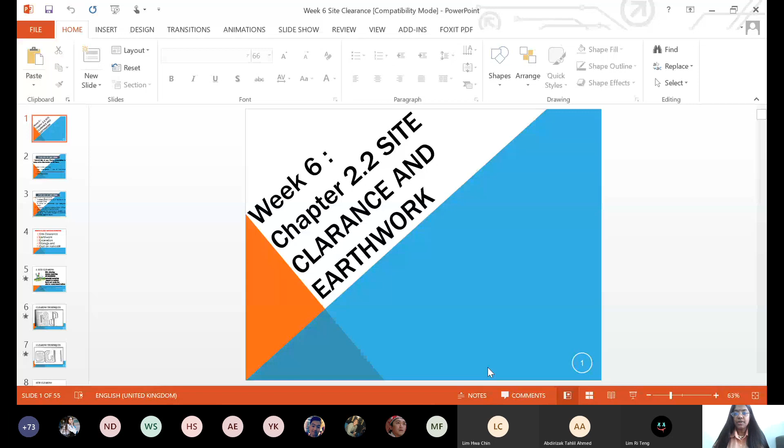Yes, okay, thank you. So last class we started with site planning, which is the second topic under construction technology. Last class we saw under site planning, we had site investigation and site preparation. We had some information, guideline codes, and methods under site investigation and site preparation.

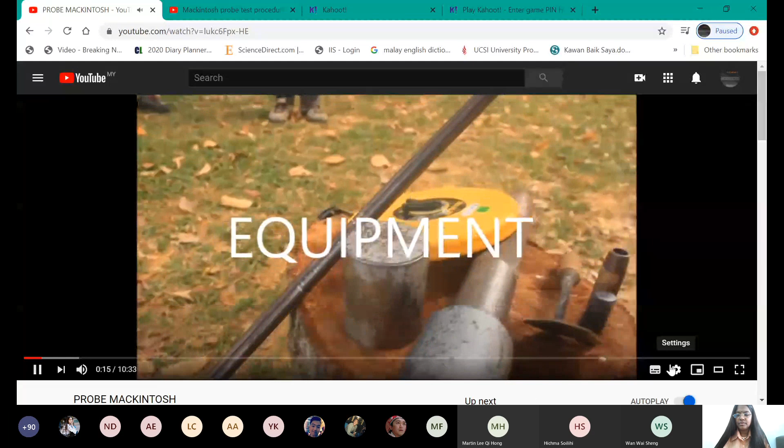The equipment you need to carry out the Mackintosh Probe are boring rods, rod couplings, penetration cone, measuring tape, hammer, oil or lubricant, gloves, lifting tool, and trowel.

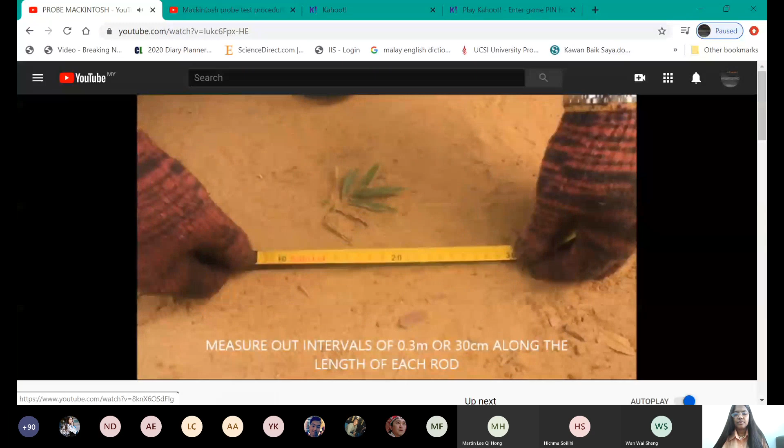Step 1, Preparation. Measure out intervals of 0.3 meters, or 30 centimeters, along the length of each rod and mark each interval with liquid paper.

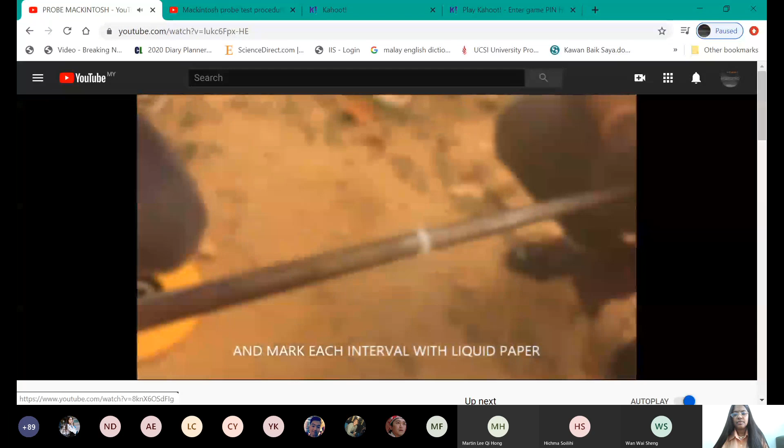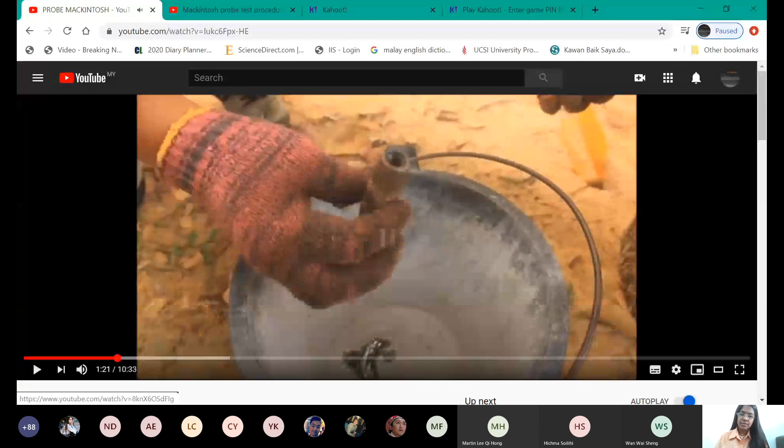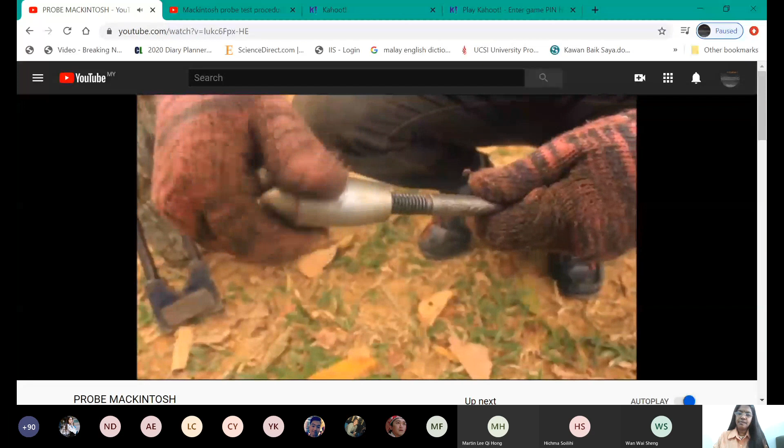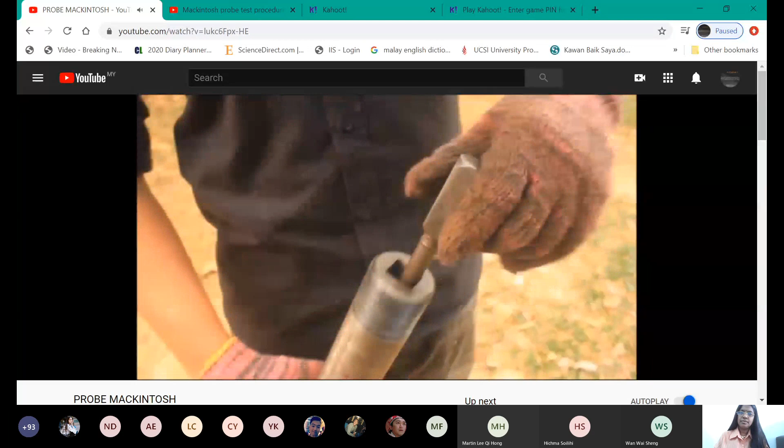Step 2, Equipment setup. Using oil as a lubricating medium, lubricate the screwed ends of each rod coupling, and also the penetration cone. This must also be done for the hammer part. Ensure that the lubricant covers all the screwed parts well. Attach or screw in the penetration cone to the first rod. Insert the hammer into the rod and screw in the stopper, ensuring that the stopper is firmly attached. It is important that the stopper be screwed in tight enough and properly to avoid any injuries. Finally, screw in the cap of the hammer tightly.

Step 3, Location. Make sure the area of soil at which the rod is supposed to penetrate is clear of any rubbish, debris, or tree roots. Position the penetration cone along with the rod and hammer firmly on the ground.

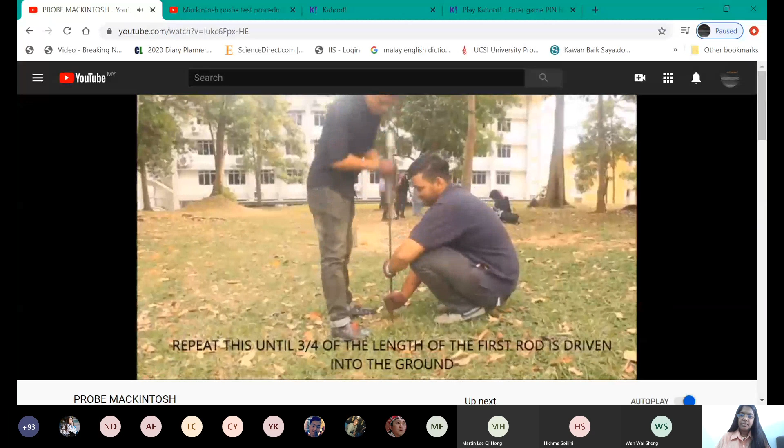Step 4, Penetration. Hold the bottom and middle part of the rod very firmly to avoid slipping. This ensures that the rod is inserted into the ground in a straight position. If the rod is tilted, it may be damaged or bent as it goes deeper into the ground. Lift the hammer upwards until a click is heard. Then release the hammer in a manner that allows the weight of the hammer itself to drive the rod into the ground. Repeat until the rod is inserted either up until the 0.3 meter intervals or until an accumulated number of 400 blows is reached. Record the number of blows the rod required to reach its 0.3 meter interval. Repeat this until three-quarters of the length of the first rod is driven into the ground.

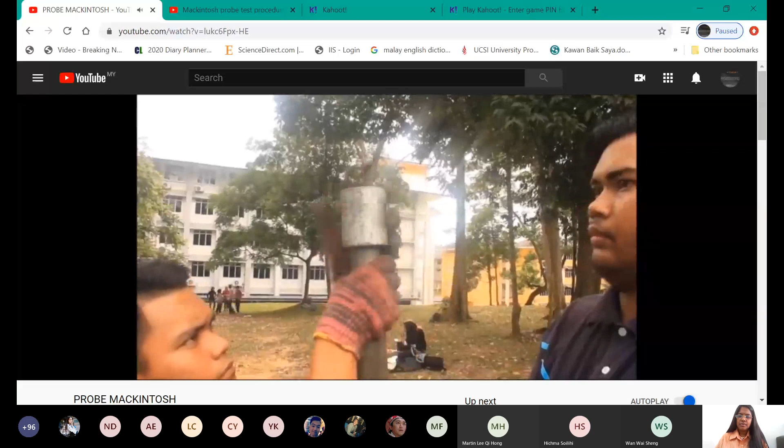Step 5, Attaching more rods. Unscrew the hammer cap and the stopper, and then take out the hammer. Screw in the rod coupling. Attach the second rod tightly. Insert the hammer back into the rod and screw in the stopper and hammer cap. Continue blowing and recording the number of blows.

Step 6. Dismantling equipment. Once an accumulated number of 400 blows or 4 rods have been achieved, the rods can now be taken out. Start by unscrewing the hammer cap and stopper.

Take out the hammer from the rod. Using a lifting tool, extract out the rods as shown. It's called a pipe wrench. You can use the pipe wrench to extract the rod.

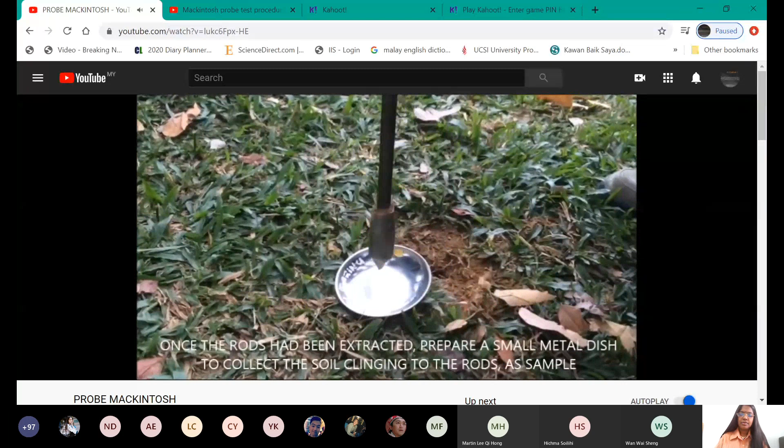Step 7. Sample collection. Once the rods had been extracted, prepare a small metal dish to collect the soil clinging to the rods as sample. A trowel can be used for this.

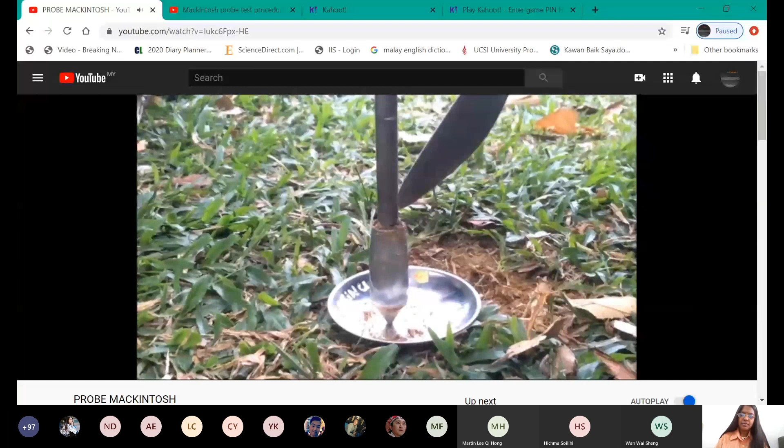Collect enough soil sample to be brought back to the laboratory for testing.

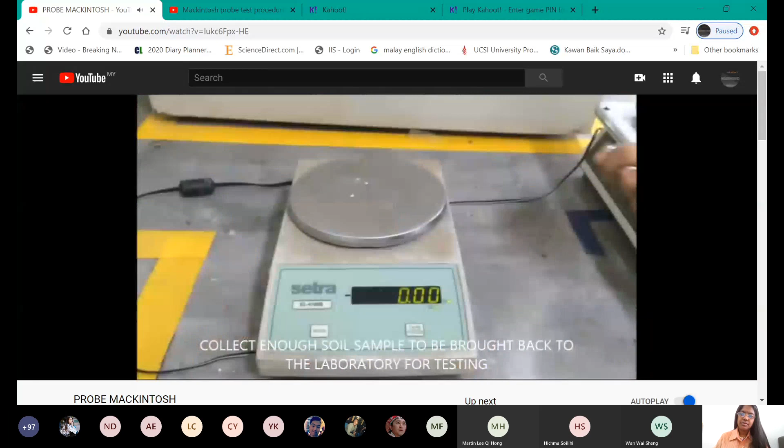Step 8. Laboratory work. Record the weight of the empty dish. Next, record the weight of a soil sample in the same dish.

Place the dish inside the oven to dry out all the moisture in the soil. Leave it inside for 24 hours.

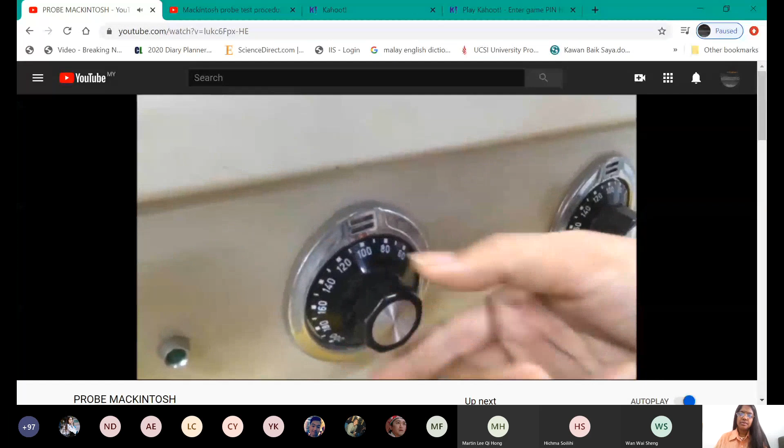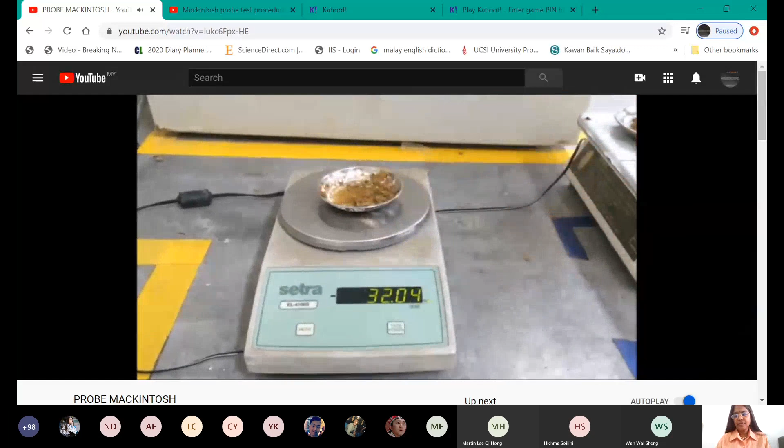After the 24 hours is up, take the dish out and weigh it again. Record the new reading. All the data and readings recorded can then be used to carry out soil moisture testing.

Okay, I stop here. So you have seen the soil sampling for a moment.

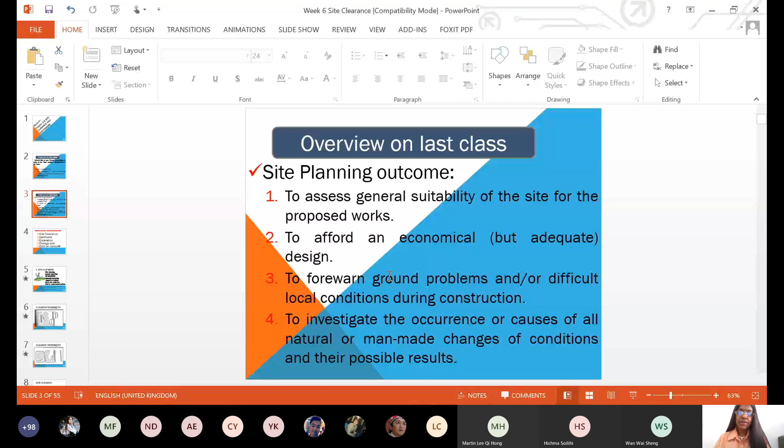Site planning outcome. Last class you would have come across all these topics, and then the understanding on how the site is prepared for construction and what are the advantages, according to the code number, right? All the statements are taken from the British code for site investigation.

Then next one, today's class will be on site clearance. Next topic under site investigation is after site investigation, it goes for site clearance, site preparation, and then earthwork. I put preparation and clearance together, then earthwork, excavation, storage, and quiz and Kahoot. This is the plan for today's class. Let's go quickly on this.

Site clearing. So what comes to your mind? Just clean the surface for elevating your structure, right? The surface should be clear from the very beginning before you encounter any future problems or future works. You should not plan for any future works during site clearing. It should be done in the beginning itself before construction starts, so that you can save money, save time, and unforeseen things will be eliminated. Site clearing means removing all unsuitable materials, including topsoil.

Including topsoil means wherever it is, up the hill or very high, very low, we need to balance out to reduce the level and ready the site for new construction, according to the contouring of your plot - we will see the profiles later. According to the profiling in the contract document, you need to level the ground. You need to clear the site and level the ground. These things are done under site clearance.

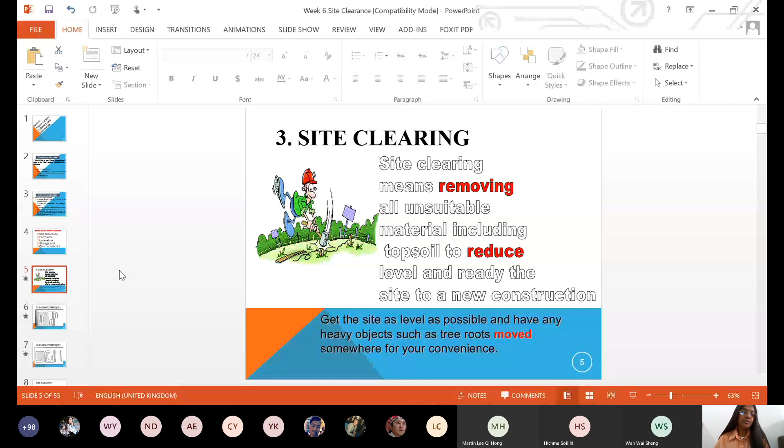You can have a plan based on the given site - it depends on the site condition. Maybe more forestry, or sometimes cemeteries you have to remove. Sometimes you need to burn - later you will see how the clearing is happening, maybe by burning or by implosion. By using implosion, you can remove those bridges. If it is metal, you have to burn it, set it to fire so that it melts and you can remove those strong structures from the site.

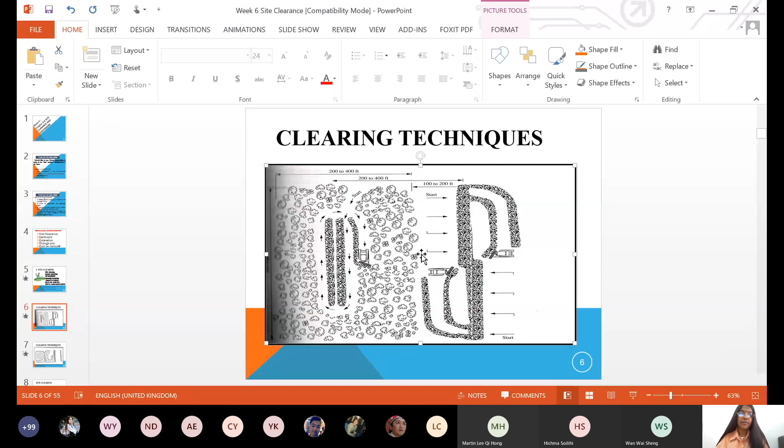This is another example of clearing techniques given here. There is no strict procedure as such, but the main concept is that cut and fill should be equal, or cut should be less and filling can be more - actually, you have to cut less and fill less. Even if you cut more, fill should be less, so that you can save some soil for reuse, or you can even sell it. These are the concepts we have to keep in mind, depending on the site conditions.

During site clearing, topsoil needs to be removed because it is easily compressed and unsuitable for construction. Loose soil has to be removed because you're going to construct the foundation reaching the strong strata below the ground. So you remove all the topsoil that won't give good bearing capacity or strong foundation strength, starting from a subsurface layer that is a little harder, until you slowly reach the harder surface.

Establish the exact position of the building from your site plan, which will show the plot measurements and position of the drainage, and so on. You have to mark with charcoal or any liquid paint the position at the site where the drainage is going to join the main line - that is important. Also mark where you are taking the water line from and where it leads to the houses.

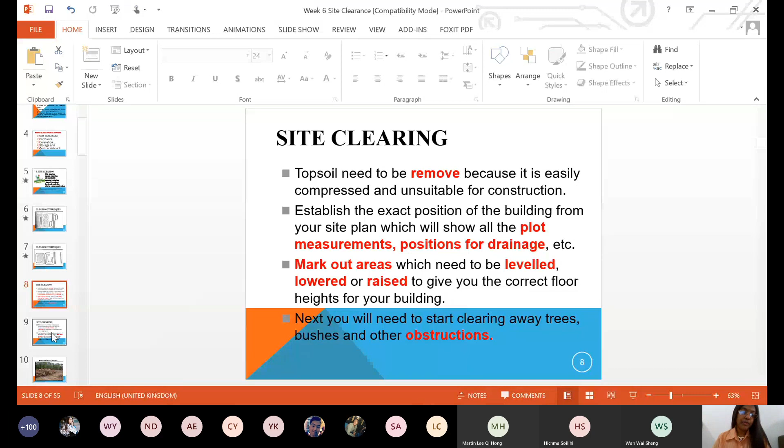Site clearing: make sure any existing underground services like electricity, water, and gas supplies are clearly marked and identified so they are not damaged when digging out. Care should be taken for these three: water, electricity, and gas supplies. With water, it may be water supply or wastewater supply, which is municipal supply already there—you should not disturb them, maybe because you will be joining to that main line. You should not damage any electrical transmission line. There may be a small building you've seen on your way home hosting transmission lines for the whole community, so you should not disturb them. Care should be taken to avoid such disturbance to public utilities.

Normally you will clear the ground about 2 to 3 feet beyond your marked points to allow room for pouring foundation footings, block work, drainage preparation, and damp proofing. So you can have extra foot but not very deep.

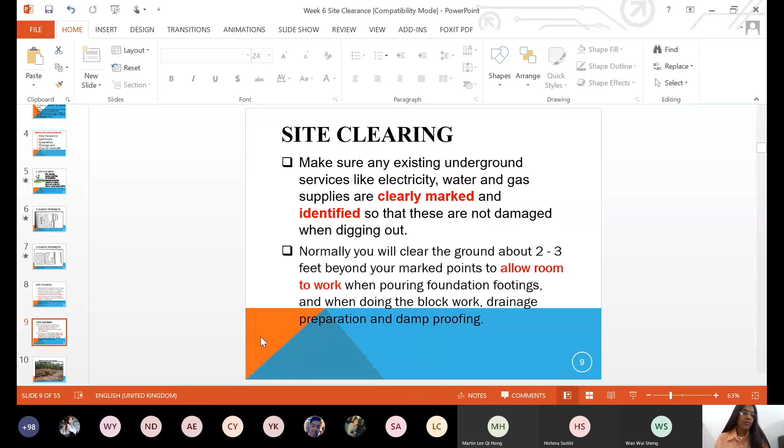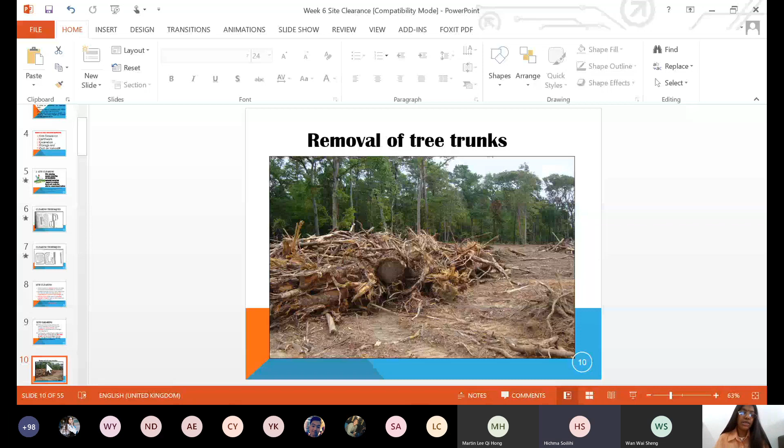For cutting soil, if it exceeds 1 foot, you should get approval. Care should be taken, and if you read the guideline you can find this information. If you're cutting soil below or above 1 foot, you should get approval from the land authority for marking. All these rules and regulations are written in the building bylaws—UBBS, Uniform Building Bylaws—under the land authority or Ministry of Works.

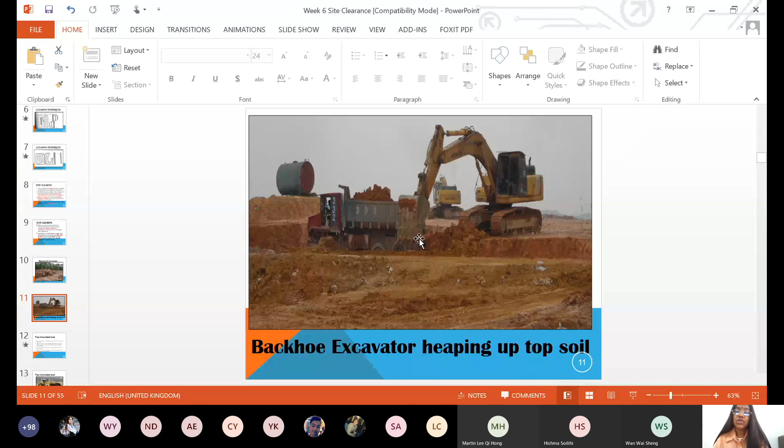Okay, you can see the backhoe which is used for clearing the site. See here, it's not leveled—there are some hills, very high, not level. So slowly it is removing or cutting the soil using the backhoe. You can see the sharp, pointing ends which cut the soil, collect it, and fill it into the truck so it can be disposed of or cleared from the site.

The type of machine used will depend on the soil and rock present. Hydraulic excavators—most backhoes work under hydraulics. You can also see cranes, shovels, dozers, bulldozers, loaders, and scrapers—excavators, all based on hydraulic principles.

I will not go into the hydraulic principle—you might have studied this in fluid mechanics. What do you call the principle? Pascal's law, right? Pressure applied at one point is distributed equally and uniformly throughout the section or area. That's different from what you'd learn in general fluid mechanics—it's a very interesting mechanism from which many applications have come out.

This is one of them, hydraulic press, using the backhoe. The type of machines I explained already—shovels, dozers, bulldozers, scrapers. Carriers are also important in making site clearing work faster. If the trucks are not sufficient to carry your removed soil, the work will be delayed, so plan sufficiently for the amount of soil to be cut and transported off.

Each machine has its own capability and use in various situations. So even as a civil engineer, you should know some mechanical functioning—what horsepower it works at, what velocity it travels, how much it can carry from one place to another, and the capacity of the truck. You should know all these things to plan your time for site preparation nicely.

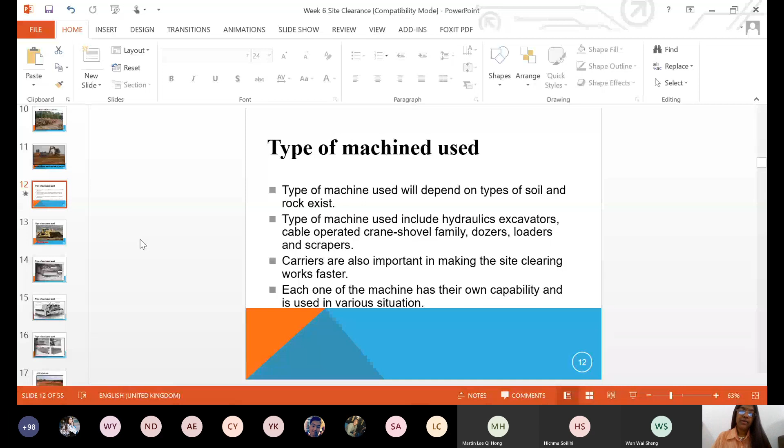Once site preparation is done on time, you can further ensure quality of work and completion on time. Another type of machine is the bulldozer—this is called a bulldozer.

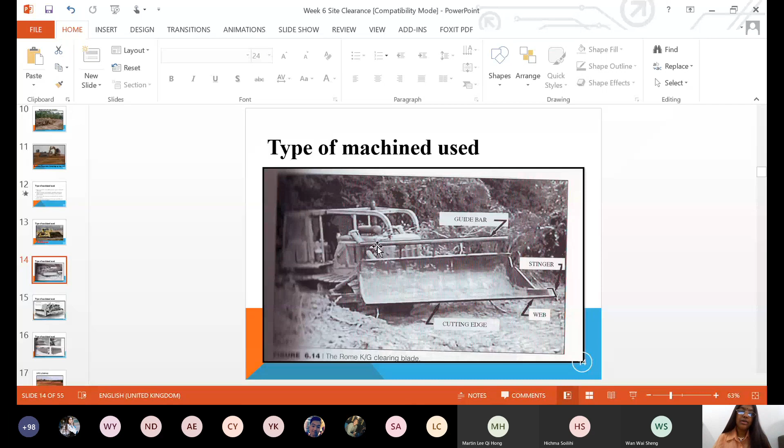Again, it is having a big bucket which can move huge soil, huge waste at the site. Then another type of machine used is a clearing blade, bulldozer. You can see the big pan or bucket, it's having a cutting edge, it's a small web to position the soil, and a guide bar which can be moved up and down.

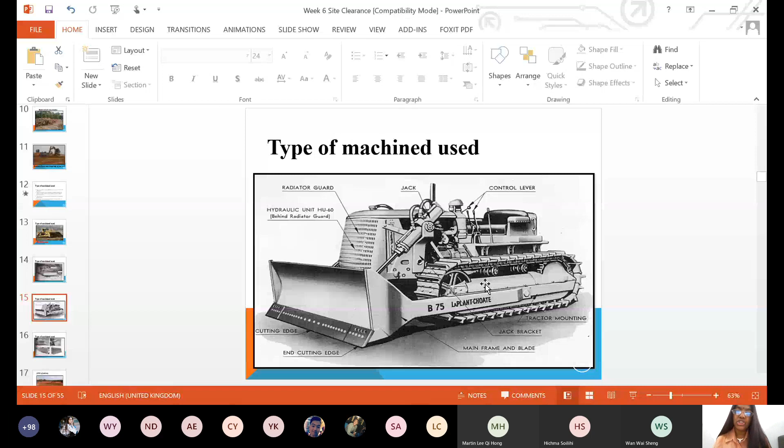And then another type of machines used, you can just have a knowledge on all these things. What are the parts of the machine, I don't ask in the exam what is the part of the machine, but you must be knowing parts of the machine and how they are operated, how they are positioned, how they are used while in operation.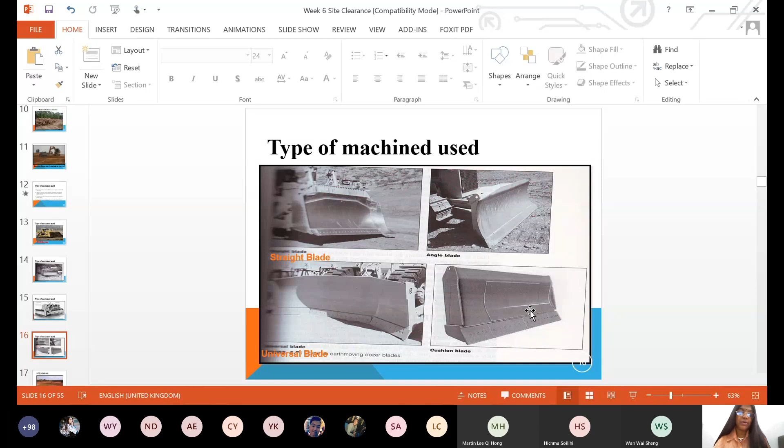Further, the blades or buckets may be having a straight blade, angle blade - the angle may be 30 degrees or less - and a universal blade, right? Something like this. And then a cushion blade, which has a smothering effect. Maybe for loose soil it is important, but for hard soil you have to go for straight blades, right?

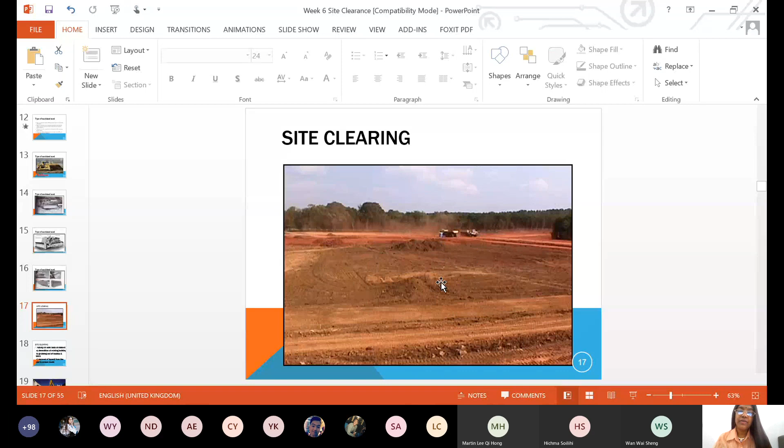Site clearing - see the site somewhat clear, it is ongoing, the process is ongoing. It may look like this. You must have a barren land, cleared surface for starting your foundation.

Site clearing activity is for demolition of existing building, grubbing out of bushes, trees, removal of topsoil from the site to reduce levels. Site clearing mainly means removing rubbish, removing bushes, removing topsoil which is loose. If it is hard, you don't disturb it.

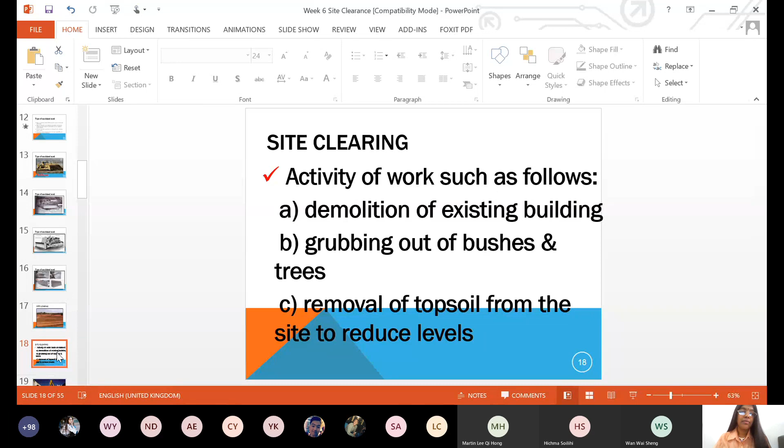The next one - demolition of building using logistics. So what are the equipments that can be used for demolition or removing dislocation of things from the site? You can use logistics like backhoe, excavator, bulldozer, or you can also use implosion.

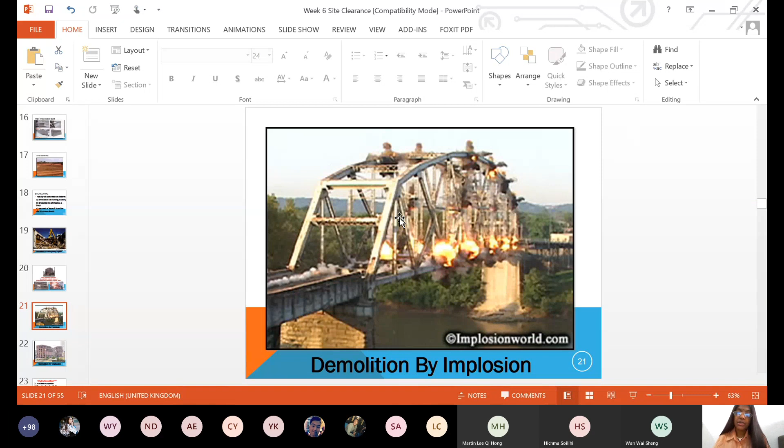There you can see the site is having a bridge, an old bridge, which has to be removed, cleared off. So they implode it. Explode is purposely explode - now this one is imploded so that it will not affect the place, the facilities nearby. It is imploded so that it will be removed nicely without affecting the neighborhood. This kind of firing, burning also, you can use for removing site disturbances or site materials.

A skilled occupation, simply put, breaking, should only be tackled by an experienced demolition contractor. Otherwise you know the effects - maybe risk to the people, the workers at the site, risk to the construction site, risk to the neighborhood. There are certain methods to demolish unwanted old buildings without causing danger to the building nearby.

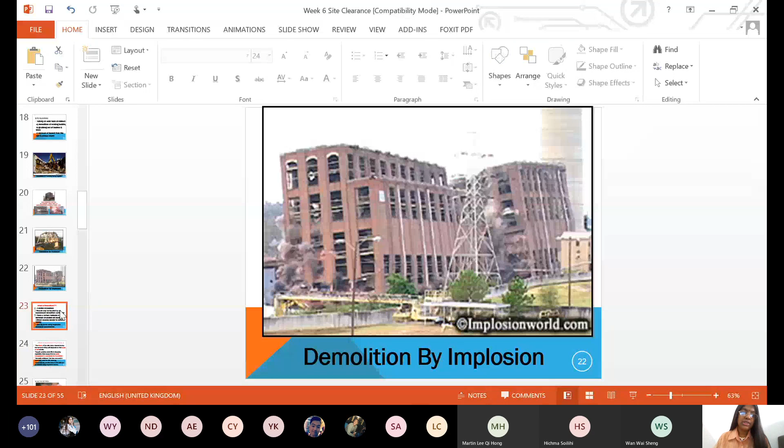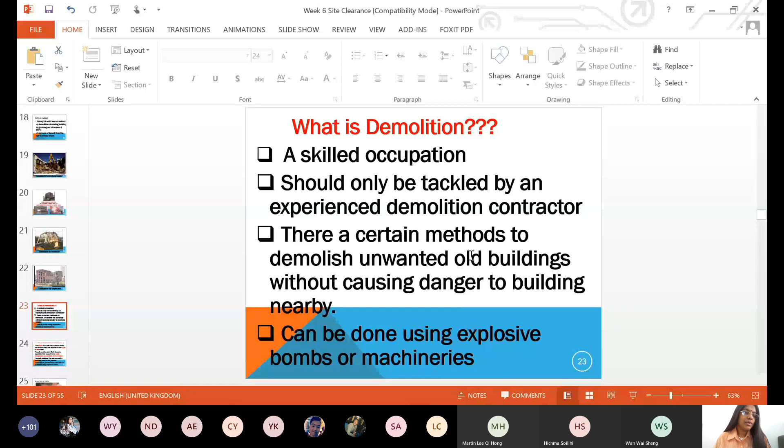It can be done using explosive bombs or machineries. This is quite common in USA. We can see quite a number of buildings being demolished, mainly because they want to start from the underground - they want to build some 100 floors below the ground. They start with 100 floors below the ground, then raise up to the superstructure. So their plan is to have all structures constructed with underground structures. So they demolish and reconstruct. This is quite common in USA, Japan, and China.

What is demolition? The depth of the site being cleared during the removal of topsoil depends on the types of soil at the site - whether it's 1 meter to 10 meters, decided by the type of soil. Topsoil contains plant life, decaying vegetation, compressed and unsuitable for foundation, so you need to remove all these plant roots - you have to completely deroot the plants and the trees.

Normally bulldozers and excavators are used for site clearing. Unwanted big granite rocks in the site can be cleared using explosive bombs. Rocks cannot be cut and removed, right? So you need to blast it to remove from the site.

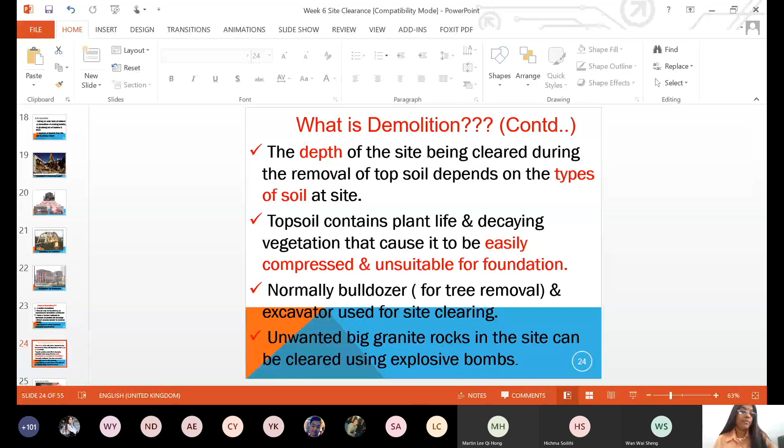Followed by blasting rocks, you must take care for the supersonic effect, sound effect from this blasting. You must really use the proper time to explode, inform the neighborhood, or inform people some kilometers away from the site about this blasting. Proper information and indication should be given before blasting to avoid any ear problem. The surplus soil is being excavated for site formation and site leveling. Existing rocks were broken down by excavators.

The lorry carried the debris and excavated soil away from the site. This is one example site which has surplus soil, some debris, construction waste, and wooden pieces. They are all removed and carried away by the trucks.

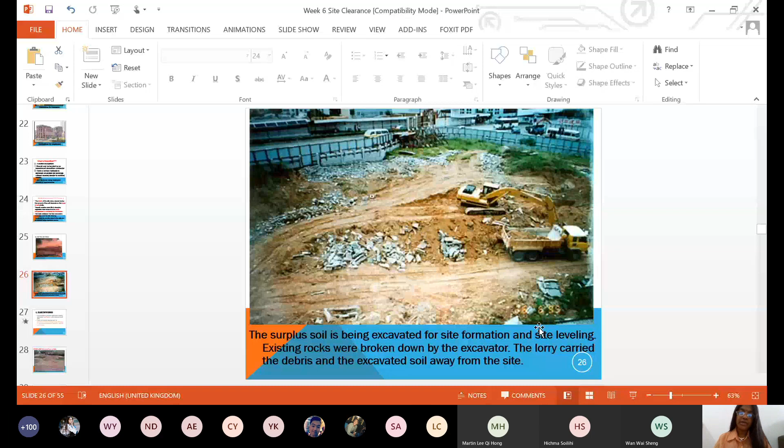Earthwork is any operation in and around land which results in substantial modification to the existing ground level. So we clear the site, then start earthwork for constructing the foundation.

The activities of earthwork are excavation, loading, hauling, placing, compacting, formation, cut and fill, and finishing. So earthwork has all these steps. We will see how they are done and what the criteria are for that.

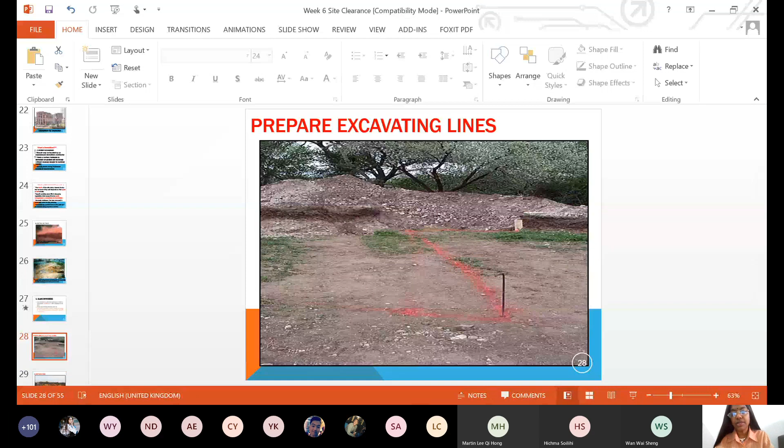Number one, preparing the excavation line. You need to mark it on the site using clay powder or lime powder, or liquid paper you can pour, or cement mortar or lime mortar, to mark the excavation lines for the foundation. Here is one example shown, where they marked it using a red line.

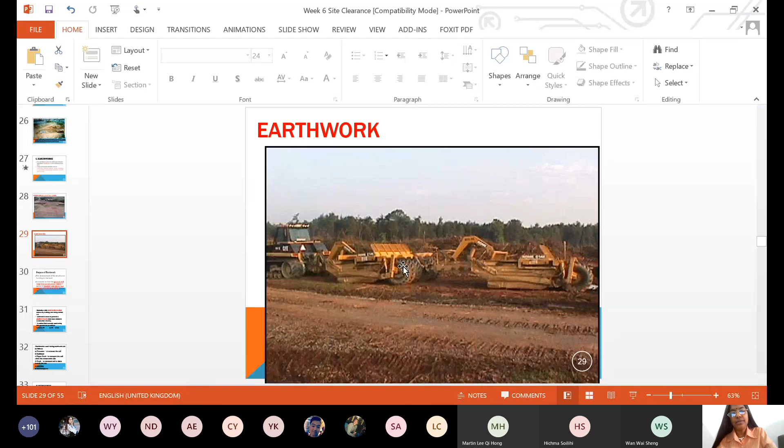Earthwork can be used here again. We are using backhoes for cutting soil, for development of the structure or building on the land. The purpose of this earthwork is to construct the foundation so the ground will meet the construction needs in terms of location, elevation, soil densities, moisture content, and so on. The process of earthwork cutting depends on the soil characteristics and rock formation beneath the ground, which decides the time and logistics used for the earthwork.

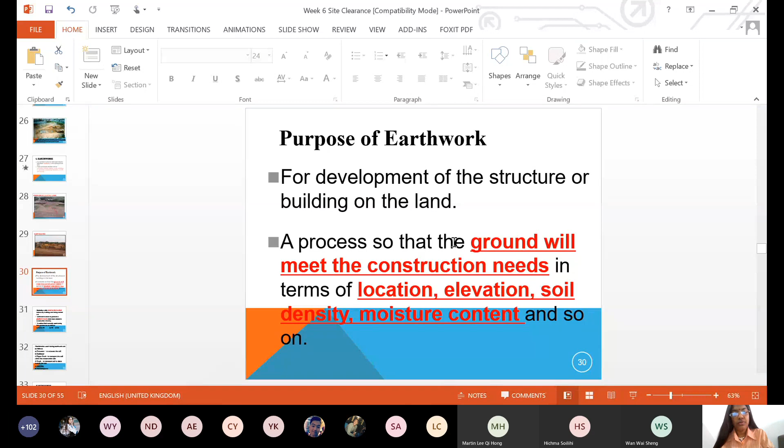Next, basically a site needs to be level before any building work is carried out. So you need to level the ground. Why do you need to level the ground? It needs to be leveled before building work begins, right, for any structure. Why does it have to be leveled? Why not just follow the profile?

To draw... because it makes it easier. To draw boundaries. So the building doesn't collapse.

Drainage - you plan for drainage, right? It should be level so that you can plan for proper drainage later on. Not necessarily, but for example, for any building they will start with subsurface construction, which is for drainage work. Then they start constructing the foundation, footing, basement, with the superstructure following. Mainly for drainage purposes it has to be level first, then you start planning from there. You already have the contours and the profile, but at the very beginning it should be level to plan for proper drainage direction for the building later on. Is this clear?

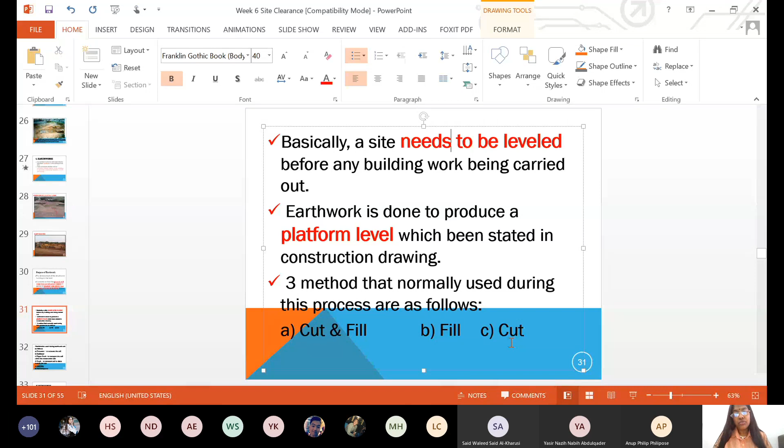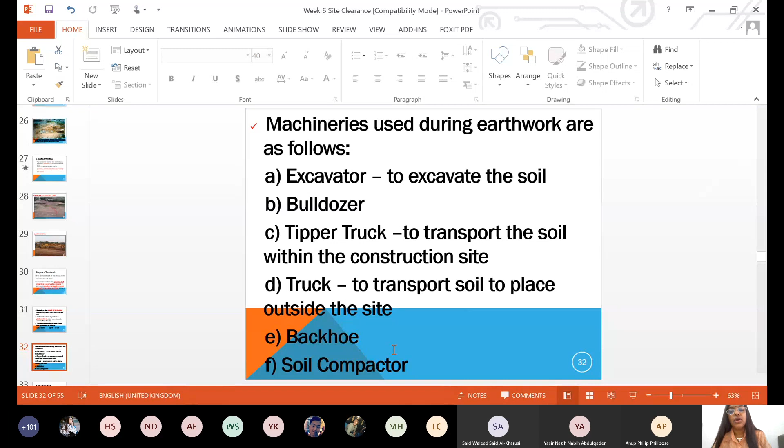Earthwork is done to produce a platform level as stated in the construction drawing. There are three methods - the types of cutting can be cut and fill, or only filling to level the ground, or only cutting to level the ground. Machineries used are excavators, bulldozer, tipper truck, backhoe, and soil compactor - all these are used for earthwork. Please read again and watch through, you may get questions like this: earthwork is done by excavator, bulldozer, tipper truck, backhoe, and soil compactor.

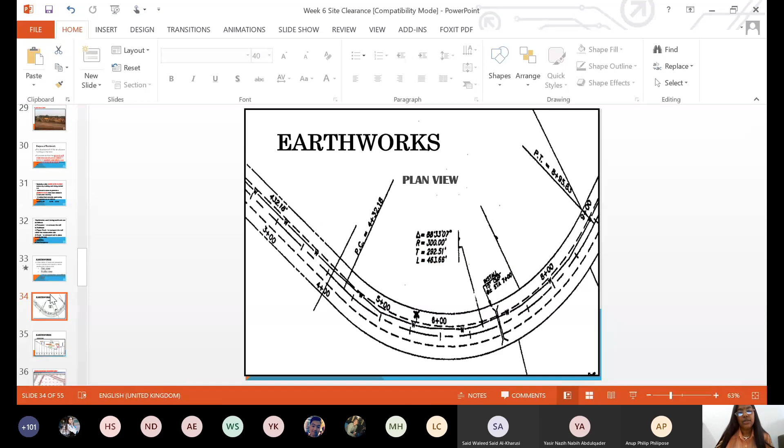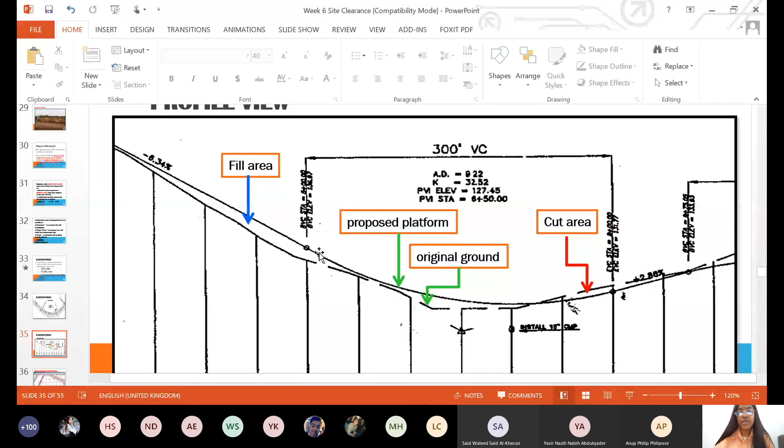So like this, the drawings will help you from the cornerstone of the building. You will plan at what distance is plus or minus. Accordingly, you will be cutting or filling to do the earthwork.

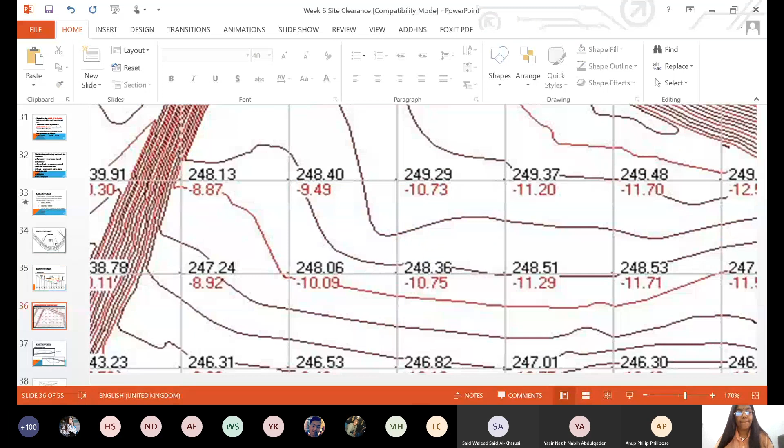Next, all these things are elevation, the depths - you can see the values. See all these things, the depth values, maybe in inches or feet.

Next, contours. What are contours? I already told you last class. Contours show the profile of the cross-sectional profile, or topo of the site. Topo, top surface - the topography of the site is given to you.

For example, you start from here, you follow this line. Start from here, follow this line all around this curve, the black one. All these points on this line have a level of 249.37. Actually, it should be denoted as plus or minus - always they have to denote the levels in the drawing using plus or minus. So it should be plus 249.37. All these points falling on this line, if you go all around, will have the same value.

So the line joining equal elevation is drawn here, and all these points on this line will be 248.7, and these lines will be 248.4, around that. They may have ranges - that's why you are seeing different numbers. They take the average and plot it. It may be between 35 to 40 or 35 to 55, because 43 is also there. For every range they take in, because there are many different numbers, you cannot follow contours for each and every point. So they have a range of values represented by each contour. You can see here all these points will be having more or less the same value.

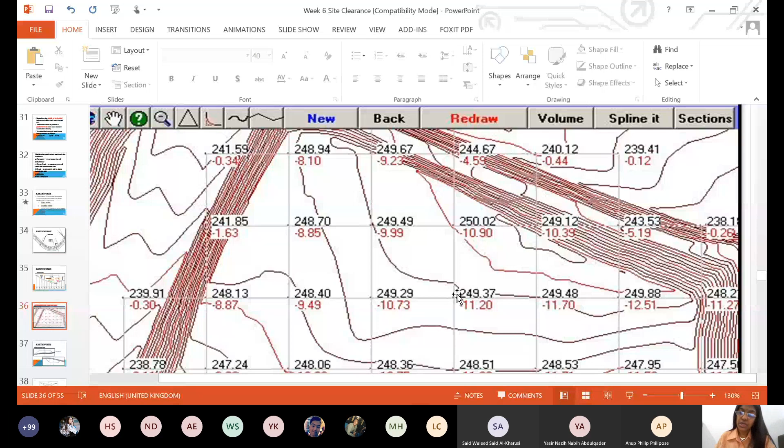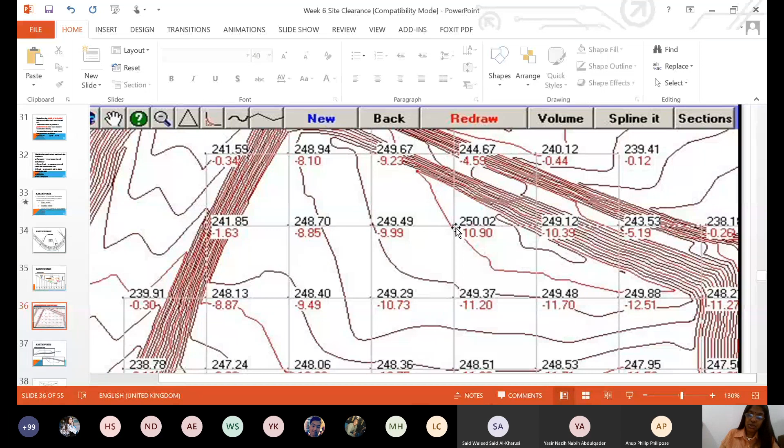All these points will have more or less the same elevation, so these lines represent different elevations across the site. You must have a profiling, so that at any point, by distance and width, they calculate the level at that point. So what is the proposed level? What is to be cut? Is it to be cut or leveled? They will decide based on this contouring plan.

But all these things are done by the site engineer. The project manager will be instructing the site engineer or field engineer. It may be a contractor appointed by the contractor, or appointed by the project owner. There will be 2 site engineers.

So everyone has to do their work, follow the guideline, follow the contract document to implement exactly as it is in the contract document. Earthwork cross section - this is cutting and filling. For example, if you cut for 1 foot, that should be filling for 1 foot. Don't go beyond that.

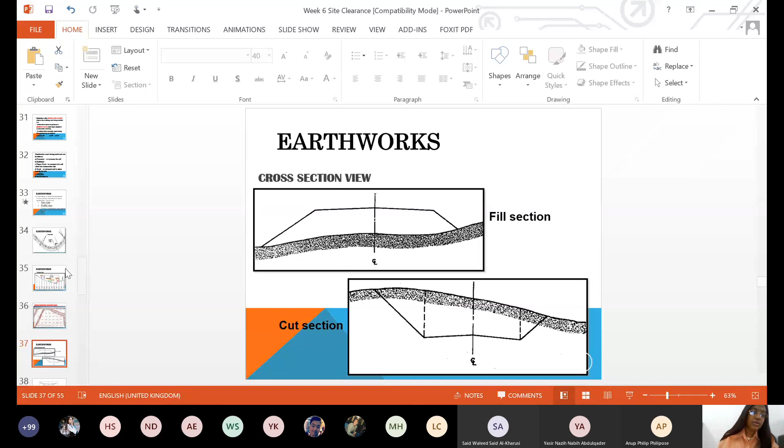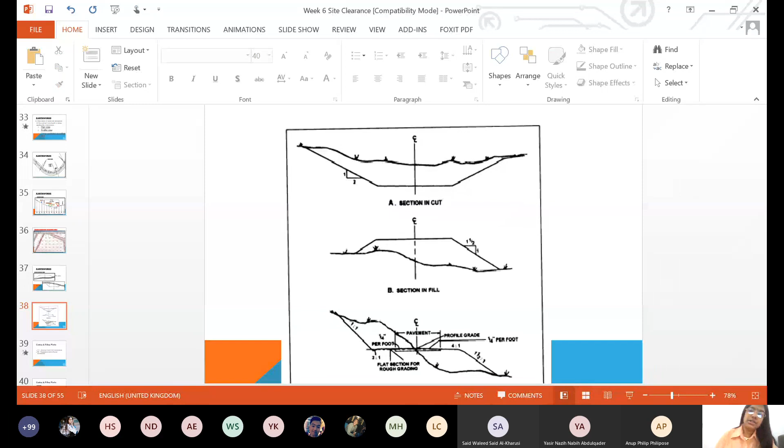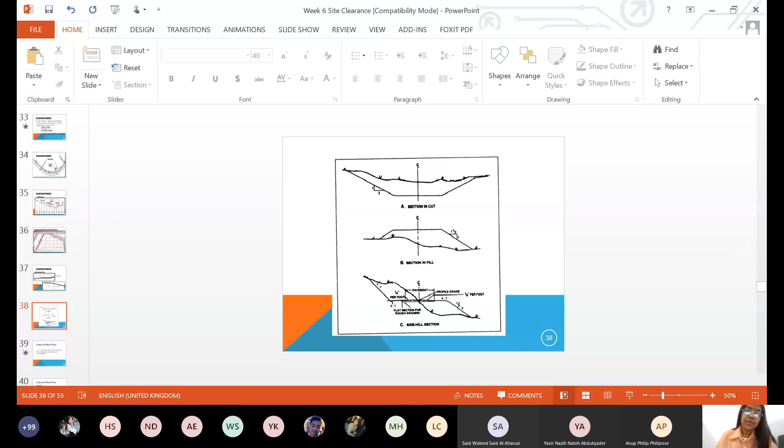You can see here the section in cut and section in fill, so that it will reach the proposed line. So it's another example of the cutting section at the site. You can also plan like this, with a sectional cut, sectional fill, and side hill section. Different drawings will give you the idea of cutting, filling, or leveling.

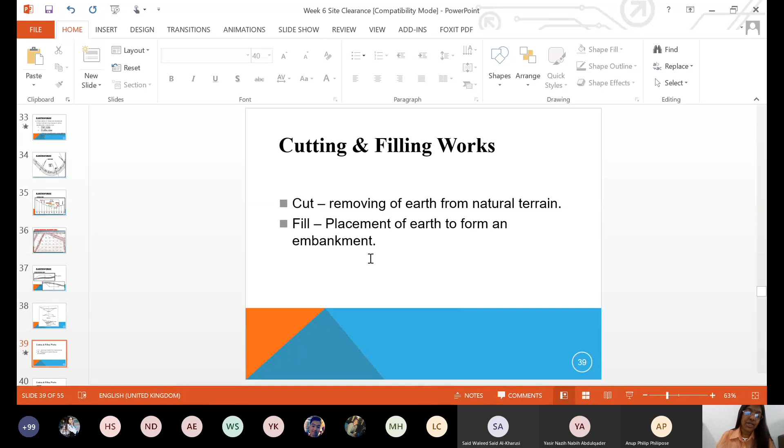Cutting and filling works. Cut means, as you already know, removing the earth from the natural terrain to reach the proposed level. Filling means placement of earth to form an embankment, or filling or leveling to reach the proposed level or proposed profile of the site.

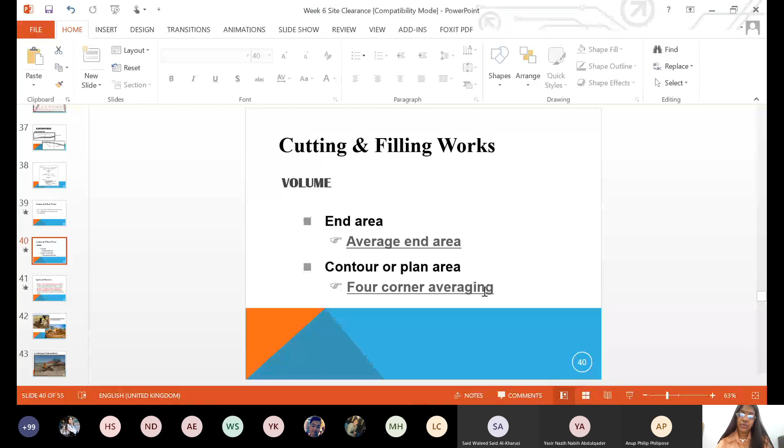If necessary I will explain later, but let us proceed with the slides because we need to complete the clearance and then go for different elements of the building. Spoils and borrows - you can also see through videos. There are plenty of videos on what methods to use to quantify the volume of earthwork. Just Google how to quantify volume of earthwork at the site, there is a strict procedure, also guided in codes and manuals you can follow.

Spoils and borrows: the surplus of the excavated earth is called spoils. A deficit of earth necessary to form an embankment is called borrows. You need to borrow it - it may be dumped beside the roadway or carted off some distance to a location for other purposes. So all the surplus soil will be filled as an embankment. They create an artificial embankment to store the soil, and sometimes there will be a deficit, obtained from beside the road or carted in from other places. Sometimes there is a deficit, you need to borrow to fill up the pits. It depends on the site.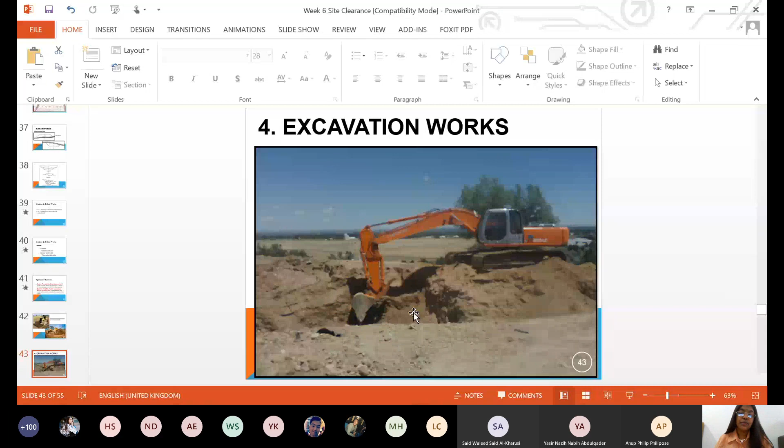Another type of excavation you are seeing here. All examples of excavation methods. It may be rocky or porous or loose soil or hard soil. Depends on the material, you need to decide which equipment needs to be used.

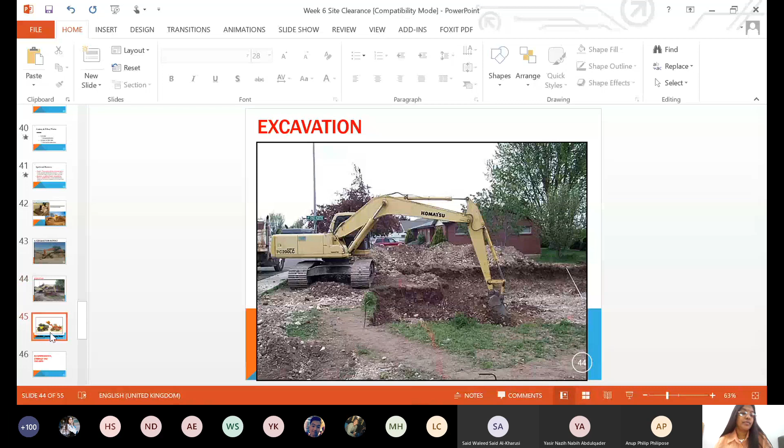The excavator loads soil into the truck. All the removed soil will be filled into the truck and then transported out of the site or dumped at the site, creating some space so that it can be used later on. How the removed soil is accommodated, stored and secured - that's what we are going to see further down. A few more slides later we'll follow with the other instructions for today.

Accommodation follows the Construction Regulations 1996 for health, safety and welfare. When you store material, there are a number of things you have to consider: safety, health issues of the people who are there to construct, the laborers who are working there, and also the dwellers beside. We need to know what the regulations are. The health and safety welfare regulations also specify how to store soil or materials at the site. Requirements differ due to the number of site workers and duration of the contract. Staff accommodation usually uses sectional timber huts, mobile caravans or cabins.

This is the material for staff - they will use a small hut, similar to what I showed in the last video and the one from Maxim. You can see a small hut made out of timber or steel shutters, which is very temporary, with hardly one aircon unit there.

You can also observe this from the video I showed on COVID construction. Did you watch that video? It's there in the very beginning, when we talked about OSHA. There's a new regulation in addition to PPE for safety at site. You can watch the video, where you see a small room with one aircon and postings for the safety, welfare and health of the people at the site.

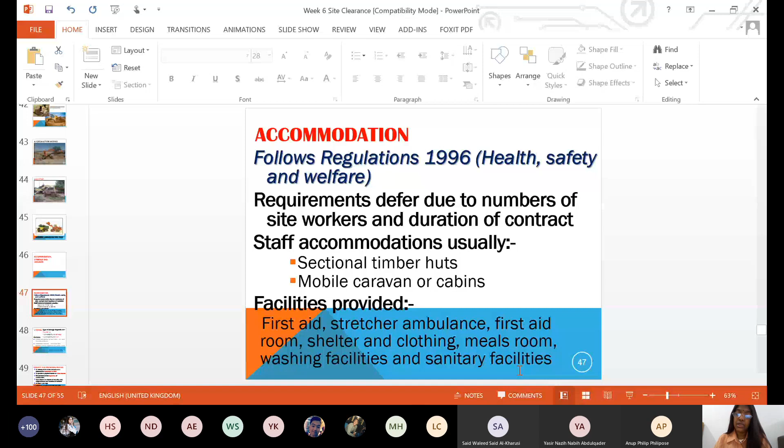Storage - how materials are stored. Types of storage depend on durability, vulnerability to damage, vulnerability to theft and leakage. Damage includes leakage, spilling, melting - if it is alcohol or volatile material, you should really take care how to store it.

Here are examples for storing materials, starting from earthwork. All the building materials have to be checked for durability and vulnerability to damage. When damaged, chances of theft should be avoided by proper fencing and cabins.

Examples: cement and plaster in bag form should be dry stored, free from moist air, otherwise it will get set. So cement and plaster should be free from water or moisture conditions.

Aggregates and sand need a clean firm base, with different materials and grades separated, and moisture content watched. Every time you have to check the moisture content, because due to climatic conditions it might change. You cannot store materials aside when construction goes on for a year or two - due to climate change, there are chances of changing moisture content. So you need to check from time to time whether the stored materials' properties are still maintained.

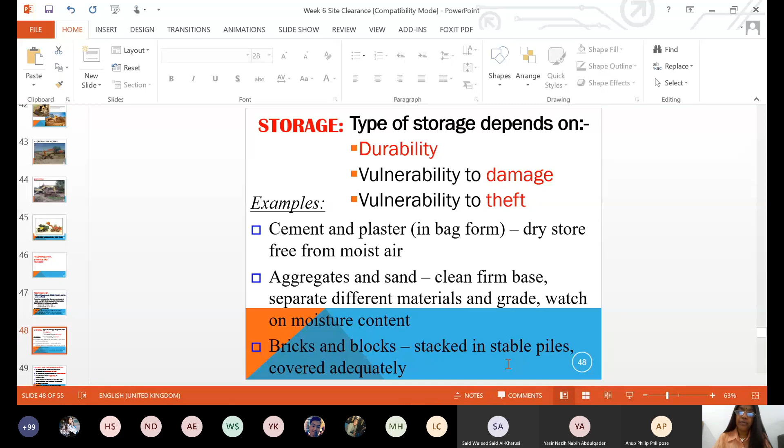Brick and blocks should be stacked in stable piles, covered adequately, otherwise they will damage, spill off, get broken, or become unusable for the purpose of building construction - they may lose their shape or their properties.

Security and protection fencing - you can use proper fencing for your materials. For security protection, you need to define the site with proper fencing so that trespassers or thieves cannot access it. There should be a physical or visual barrier to control access in and out, which should start at the beginning of construction. You have to provide secured fencing and a secured storage room for materials before they arrive.

The type of fencing depends on the degree of security needed, cost, neighborhood, and duration of the contract. It should be at least 1.8 meters high.

What's the room height? Anybody? Normal room height, height of the room, any building. 2.2? Why so very, very low?

You deducted from mezzanine floor. 3 meter, end to end, floor to head roof is 3 meter high. Normally, the height of the room should be 3 meter. If it is a mezzanine floor, it may be 2.2, lower down, or it may be for the purpose of air conditioning or central air conditioning.

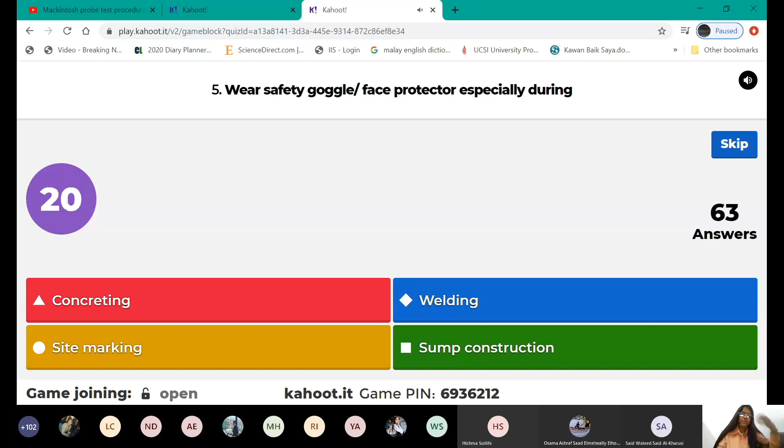Number 5 question. Wear safety goggles, face protector, especially during concreting, welding, site marking, or sump construction. The underground tank is called sump construction. Face protector.

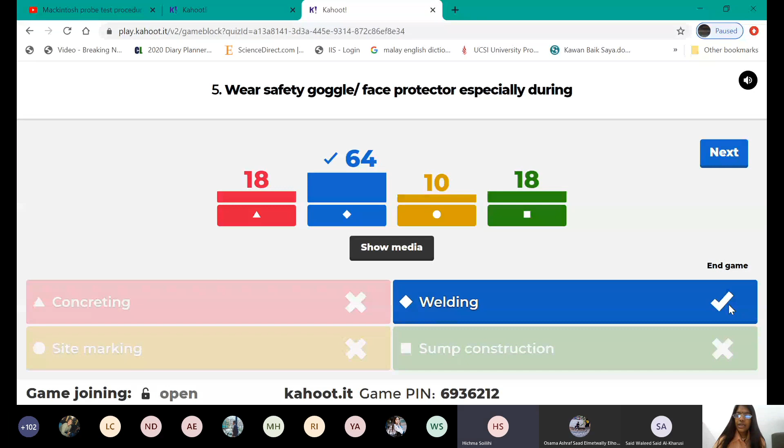You can see the correct answer, sticky here at the end. You can also see the correct answer. Can you all see the correct answer with the tick? Yes, yes. You can correct it if it's wrong. Your answer is wrong, so see the correct answer.

Lam Shu still stands first, nobody to shoot him, break his record. Wang Wei Sheng again, Fuad moved to third place. Tan Jia Wen, Mugindran, new one.

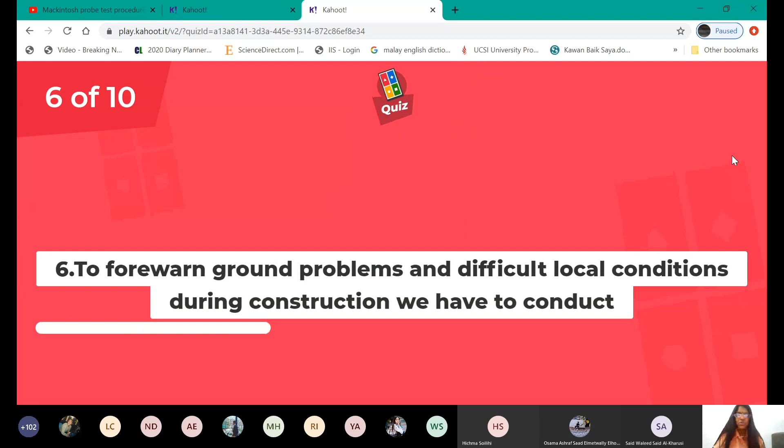Next, number 6, we have 3 more minutes left. Quick. To forewarn ground problems and difficult local conditions during construction, we have to conduct a site investigation to understand the site condition.

Very good, most of you are keeping up with the time. Almost 108 answers, 2 left. Site investigation is necessary to understand the site condition, to avoid any future problem or encounter with economic issues, spending more on future problems.

Okay, 7th question. British Code of Practice 2001 1957 has rules and regulations for site investigation. Is that correct? Is that the correct number? Rules and regulations for site investigation. You can check from your slides if you want, all from your slides.